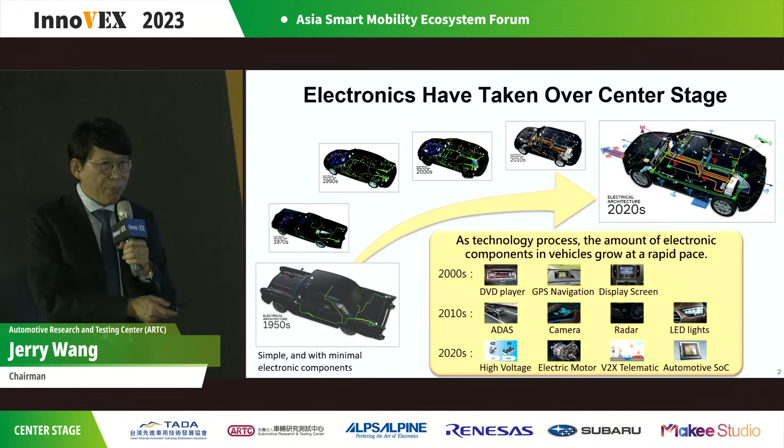Now let me introduce some data about our industry. The global sale of EVs went from just 2 million to 10 million units in 5 years. The major driver is the rise of Tesla and global government push for carbon net zero policy. So we think the EV market shows no sign of slowing down.

On the other hand, for our automotive electronic industry, the industry value was $295 billion in 2022, and is expected to reach 400 billion before 2027. The main driver is autonomous technology and the computing power of AI put in the car. Some people ask me why the car has changed so much - the main reason is AI, with many controllers, over 200-300 controllers, and processing chips put in the car.

About Taiwan, it's similar. Taiwan's automotive electronic value is increasing very quickly. In 2022, there was about 12 billion US dollars. We expect this value to double to 21 billion in only 3 years. So after three years, our automotive electronic value will increase very quickly.

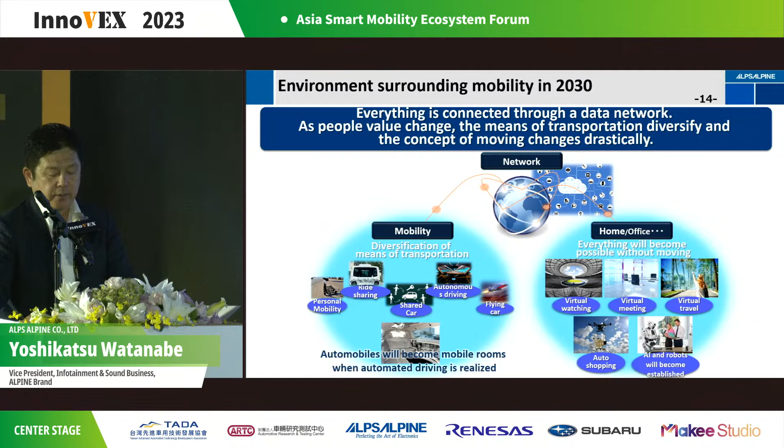Let me finally talk about our direction: digital cabin solution.

ALPS ALPINE is aiming to be an innovative T-shaped company. This is based on our strengths that we are developing both hardware and software, from device to system products, and from consumer electronics to automotive business.

So, we can utilize elemental technologies of ALPS solution and software and system integration of Alpine solution to provide new value for the changing automotive industry, as well as for other industries.

For the automotive business direction, at present, we handle almost all automotive HMIs, including displays, audio equipments, shifters, control panels, for center console, door, and armrest, and so on.

Throughout 2027, we are going to integrate all the HMIs into a group of products as an internally linked cockpit. Then, toward 2030, we are going to apply the integration process to the entire cabin space, turning it into a living room on wheels.

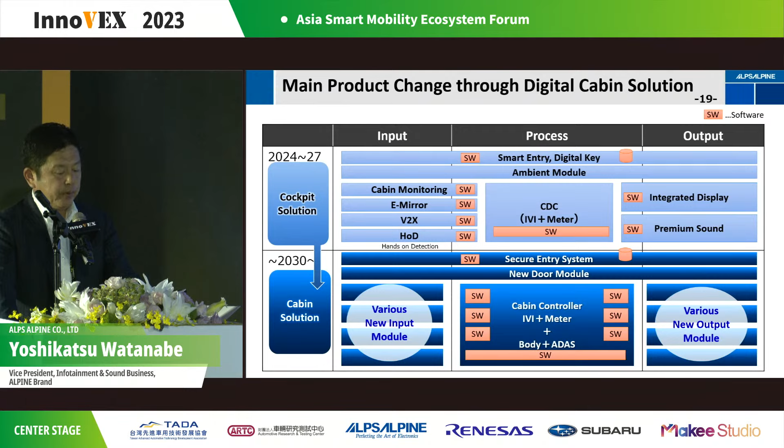Based on those architecture changes, we are adapting to provide cabin controller and necessary peripherals and middleware to realize in-cabin experience. Especially various sensors and actuators with middleware, we believe are one of the unique technologies from ALPS ALPINE.

To adapt to the architecture changes, we also strengthen alliances. We already announced a Capital Business Alliance with Nippon Seiki, who has strength around the meter and head-up display area. Also, a Development Business Alliance with TS Tech, who has strength around the seat and trim area.

We are co-developing with automotive manufacturers for the future cabin system.

One example I'll explain is developed with TS Tech last year. We call it XR cabin POC. This includes actual seat, steering, and door trim as hardware.

But the HMI interaction is realized by virtual reality, so that we can experience quickly the various use cases such as ADAS warning, immersive entertainment, relaxation space, and verify the value, then make improvements if necessary.

More recently, Renesas began expanding its footprint in Silicon Valley, first with the acquisition of Intersil in 2017, and then IDT in 2019. Renesas successfully combined its proven quality with top-class safety standards and technical competency with the innovative products and entrepreneurial spirit of Intersil and IDT. In 2021, Renesas completed its acquisition of Dialog, expanding its footprint in Europe. With Intersil, IDT, and Dialog now in the fold, Renesas enters a new era as a truly cosmopolitan company with a progressive mindset and a modern vision to lead the industry.

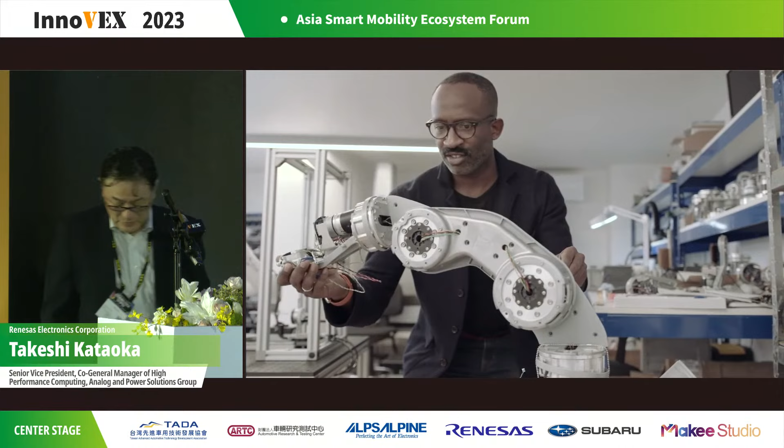What is Renesas's purpose in business? Our purpose is simple: to make our lives easier. We do this by harnessing the power of technology to complement human capabilities. And our lives don't just mean the people who use the final products powered by our technology. It means the lives of our suppliers, customers, our employees, and their families.

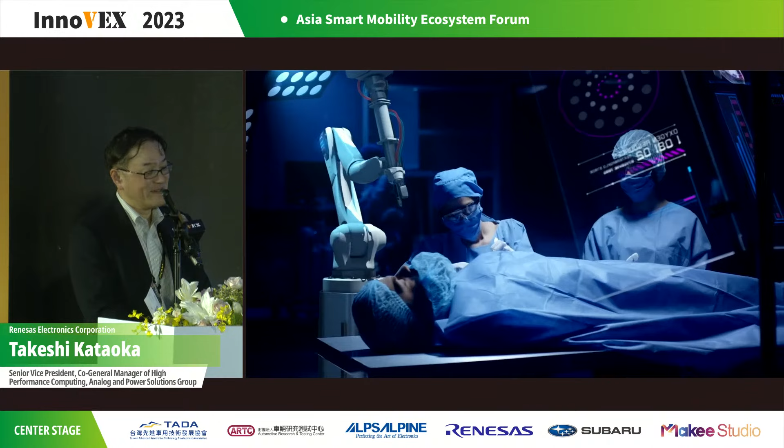To make human lives easier, our products provide advanced driver assistance systems, alternative fuel vehicles, robotics and human-machine interaction for smart factories, state-of-the-art medical devices, home appliances with intelligence, data centers handling big data and data explosion, and fast, low latency 5G wireless communication networks.

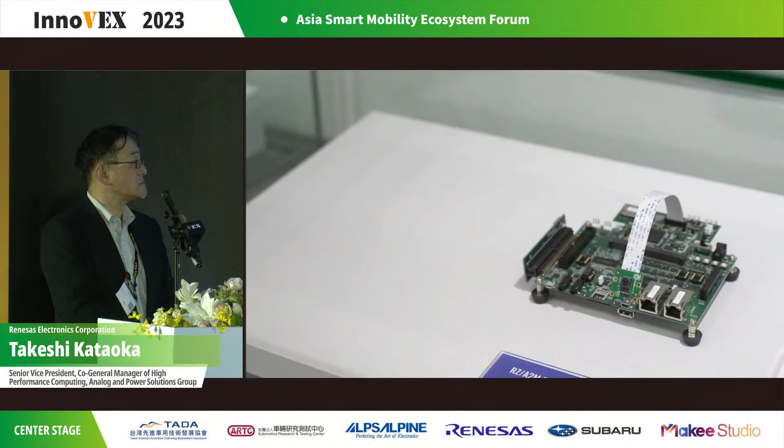To make our customers' lives easier, we deliver a vast array of semiconductor products such as MCUs or SoCs, analog and power, to provide complete coverage for the broad signal chain in electronic systems. Renesas customers win by tapping our rich portfolio of analog, power, and embedded processing solutions. Our winning combinations help customers accelerate their designs and get to market faster with high performance and high quality products. These winning combinations address the needs of new and expanded customers and continue to power our customers' systems with compelling products and solutions designed with our proven technology.

Renesas has weathered many storms and changes and is in a constant state of transformation to become a stronger organization. We will continue this journey to make a better world through our technology and make a positive impact on the way we live and work. Here at Renesas, everyone can make a difference. Together, we can make change happen.

Okay, so then next, please.

As the video mentioned, Renesas is originally three Japanese companies: Hitachi, Mitsubishi, NEC. We are strong in digital products, MCU, SoC. But after acquiring many analog companies like IDT, Intersil, Dialog, we are expanding our product portfolio, not only digital but also analog and power.

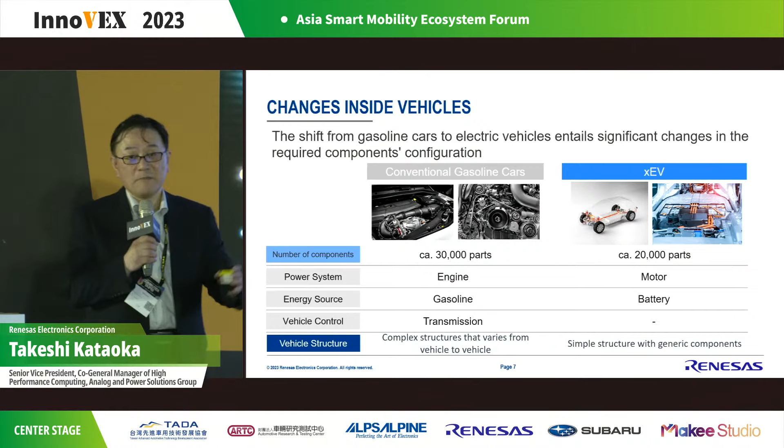Also, no more transmission, actually. And then vehicle structure will also be simplified in xEV. That means many new applications are now coming for xEV.

So with this kind of very big change, the value of a car is clearly changing from a conventional mechanical thing to more software and services. Now OEMs and Tier 1s are very much focused on making their own software platform and architecture, because the value of a car is now changing to such software and services. Especially OEMs try to define both hardware and software architecture to be optimized for such a software platform, because they think this will be the value.

For example, as you know, Tesla is making their own SoC, right? To optimize their solutions. In such a sense, OEMs try to directly connect with semiconductor suppliers and also, for example, foundries. Such direct communication is now happening.

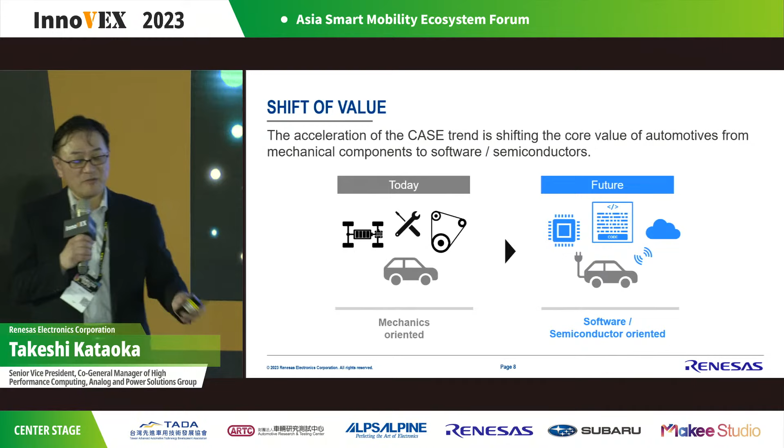Okay, so from here I'd like to explain three key things for this big change. First is the evolution inside the vehicle, meaning the E/E architecture change.

As you can see on the left side, this is the conventional old automotive architecture, a distributed architecture, which means each ECU is connected in a very complex manner. But due to this, the system becomes complex, and the number of ECUs increases. So now it's very difficult to make software and systems for this kind of complex architecture.

That's the reason why OEMs and Tier 1s are shifting to a more centralized architecture, which has a central gateway and domain controls. The central gateway operates data communication, and each domain control operates each domain. Domain means application, for example powertrain domain, chassis domain, also body domain. This centralized architecture is called domain architecture, and will enable OTA software update, scalable software development, also wire harness reduction.

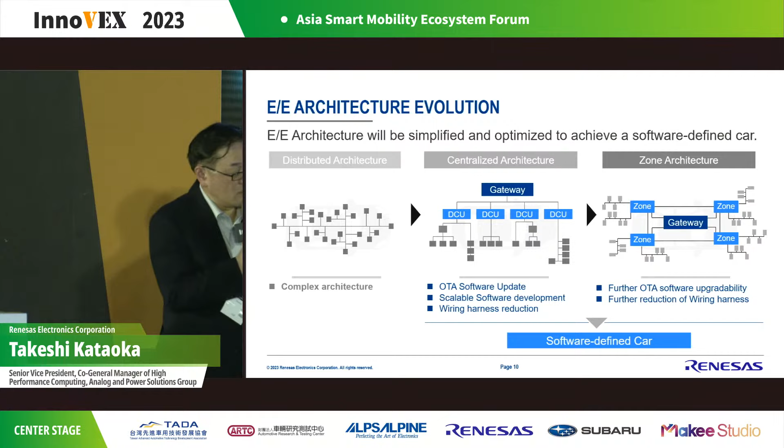must be more flexible for software reusability and software portability, because depending on the car model, OEMs think they want to reuse their software assets across car models or across car generations. So they want to reuse the same software between a zone, or between a gateway and a zone. This is a very fundamental thing.

So for such high software reusability and portability, this is a key thing for zone architecture. But this will mean faster time to market, also lower development cost for OEMs and Tier 1s. So Renesas is offering a full scalable solution with software IP commonality to realize this software reusability and portability. I will explain more about this later.

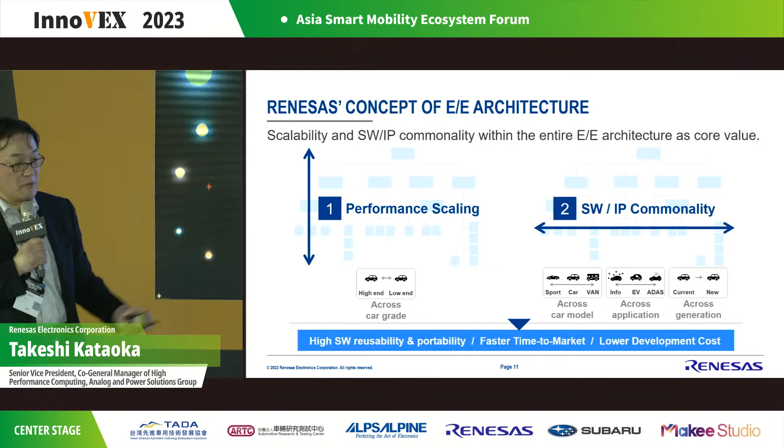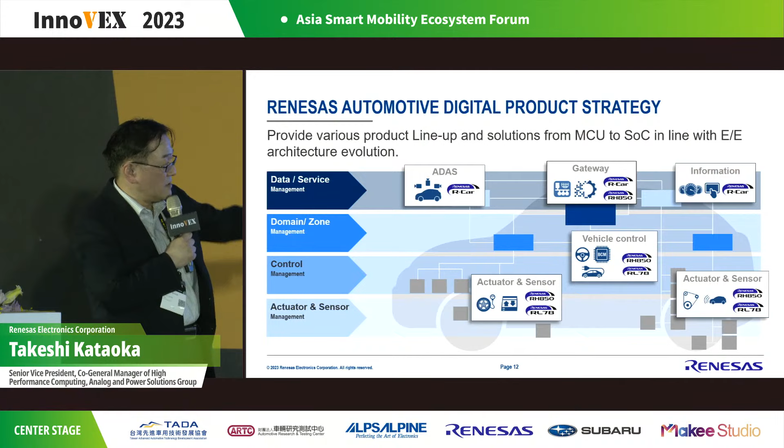Renesas is offering a total solution for various automotive applications from high-end to low-end. For high-end, high-performance computing for ADAS, gateway, infotainment, and then domain and zone control, also conventional vehicle control, by using our MCU, and also actuator and sensor solutions to manipulate a motor and such kind of thing by using our 16-bit micro for actuators and sensors.

So now let me show our central gateway solution. Please.

In a world switched on, Automotive Ethernet will become a game changer for the next generation of vehicles and mobility. While CAN has dominated the car network for nearly decades, we face a revolution for the in-vehicle architecture when moving to Ethernet-based networks. Exponential growth in bandwidth combined with quality of service allows innovative new architectures to improve comfort and safety, in order to pave the way to a highly assisted and finally the fully autonomous car.

With our partner TTTech, we have developed this evaluation platform called Vehicle Computer 2. It represents a multi-gateway solution that supports all major automotive communication interfaces, covering LIN, CAN, FlexRay, MOST, and Automotive Ethernet, and allows flexible routing between all of them. The box is equipped with the powerful Renesas R-Car H3 SoC, the RH850 F1K microprocessor, and an FPGA-based implementation of an Ethernet TSN switch.

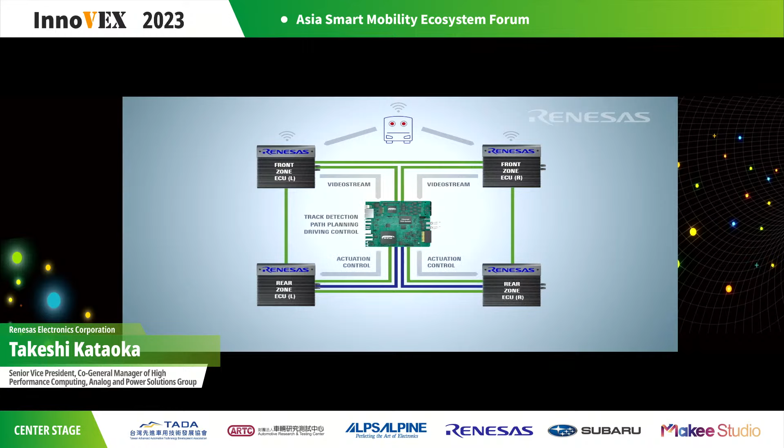These ECUs forward the video to the central ECU for track detection, path planning, and driving control. The steering and driving commands are then sent by the rear zone ECUs to the RC control of the model cars.

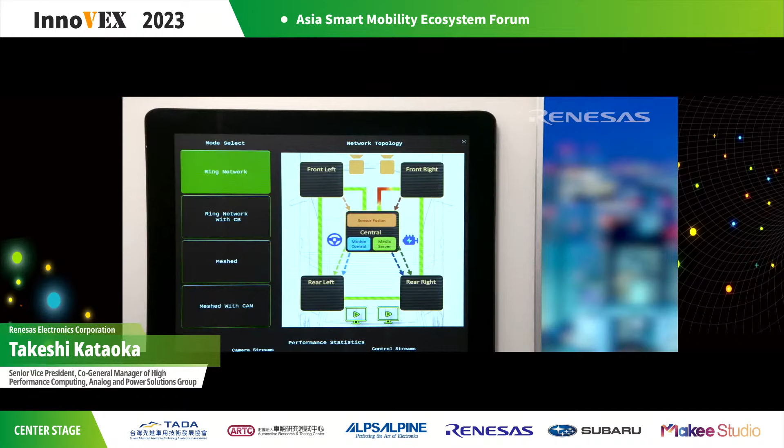With disabled frame replication mode, any failure on a link will immediately stop the car in operation. Now, after enabling frame replication, the cars move on because the existing links between the boxes will use both directions. Mesh mode offers more redundant links between the boxes. Such configuration tolerates more link failures.

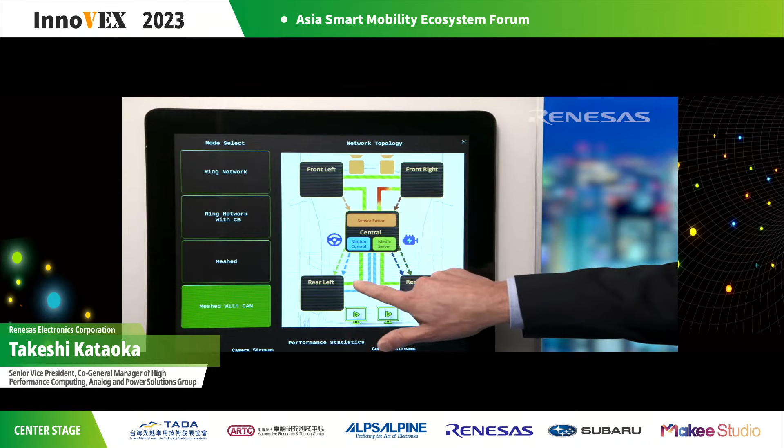Finally, a mixed network with CAN-FD and Ethernet also covers network diversification, which is an important element for functional safety. The backup for control traffic is covered by CAN-FD, so even with failures on both Ethernet links, the actuation control is still in operation. Thank you very much for your attention. I hope to see you soon on a live event from Renesas.

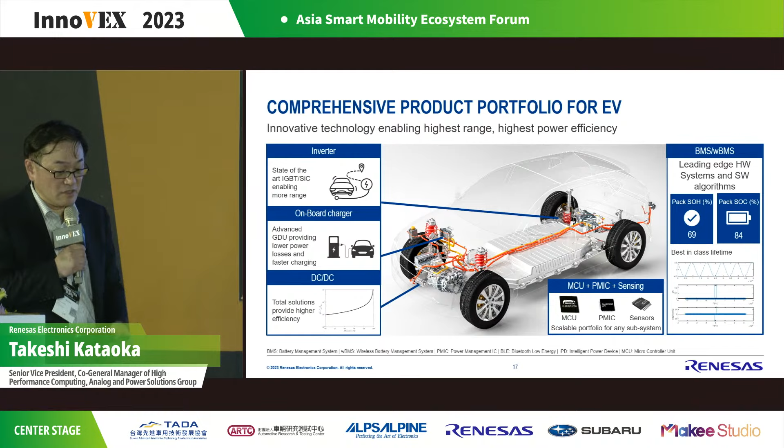So let me show our inverter solutions. Renesas Electronics XEV Inverter Reference Solution.

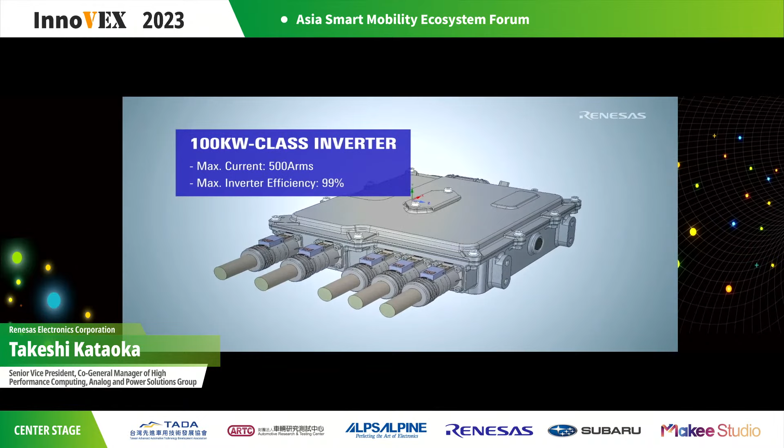This reference design from Renesas Electronics offers the world's smallest 100 kilowatt class inverter to address the rapidly growing market for electric and hybrid electric vehicles. The hardware design is complemented by a calibration tool to maximize motor performance, and motor control software to optimize the performance of the host microcontroller.

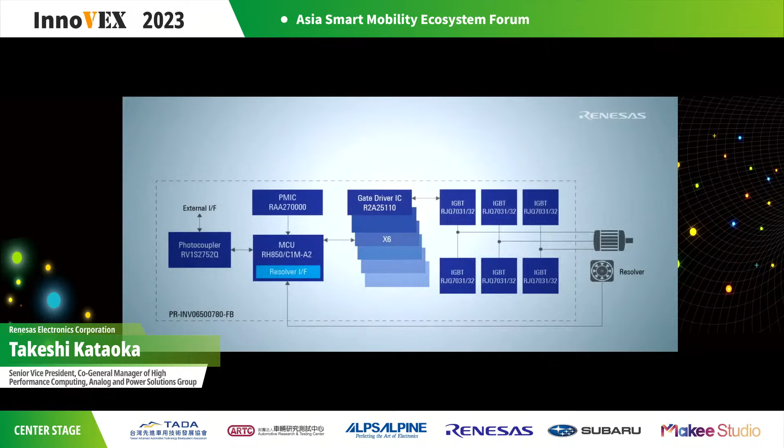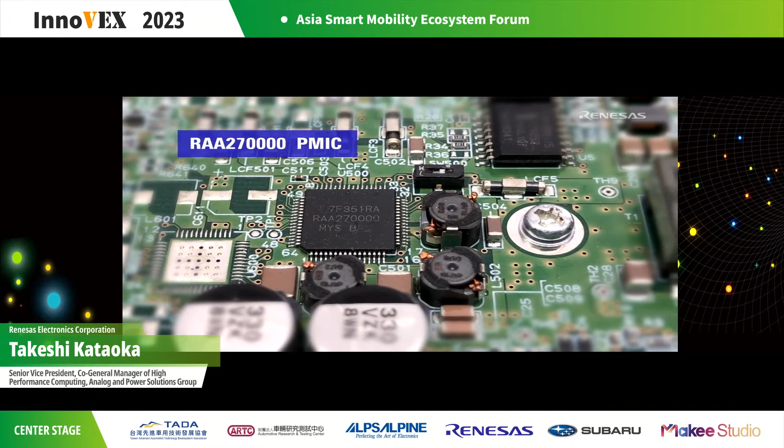The hardware design includes the Renesas RH850 C1MA2 microcontroller, optimized for motor control with a built-in resolver to digital converter, a power management IC designed specifically for RH850, a high voltage gate driver with built-in micro-isolator technology, and IGBT and FRD power stage devices.

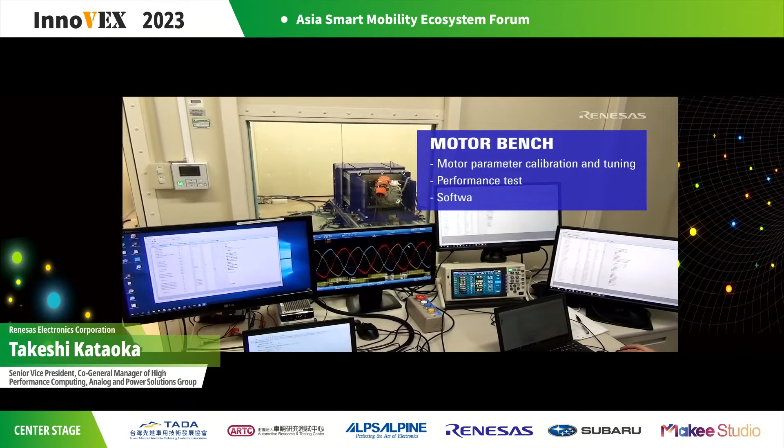Using this 100 kilowatt class motor bench, Renesas can accurately measure motor parameters and evaluate system performance using the incorporated hardware and software. Renesas is also readily available to help customers realize new requirements at the system level.

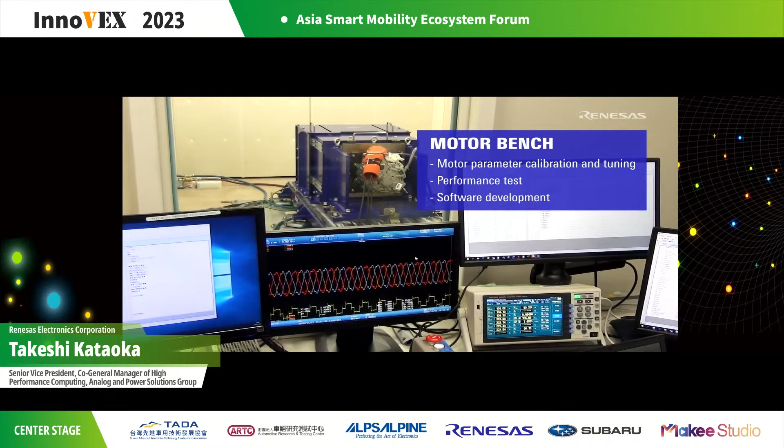Renesas has built up a demonstration vehicle equipped with this inverter and confirmed its performance in actual driving environments.

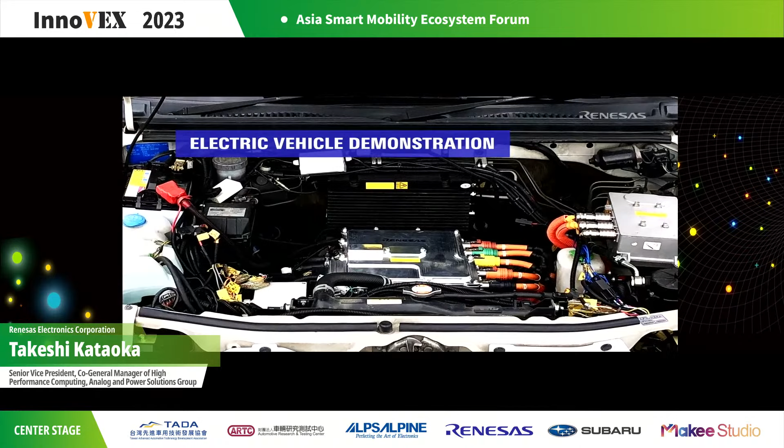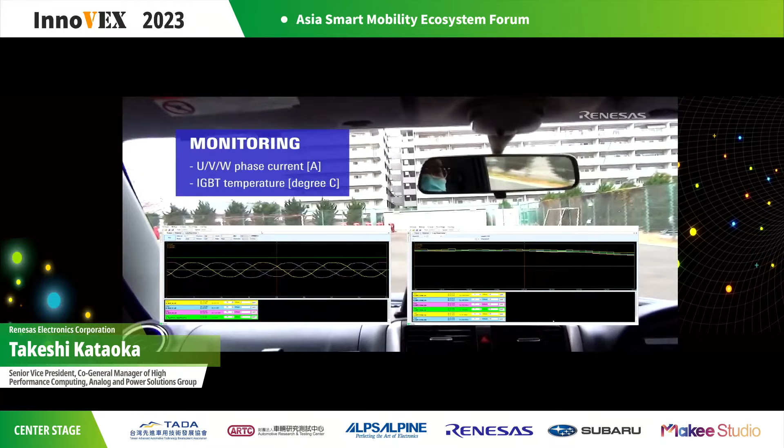Customers can utilize this solution to easily realize a highly efficient system and immediately evaluate a prototype inverter system in an actual vehicle. Prototype development that typically takes 2 to 3 years can realistically be cut in half.

So Renesas is offering a total solution - digital product, MCU, SoC, analog, and power - with software, even with a software development environment, as you can see.

So Renesas can offer a total solution using our products, especially our MCU is very powerful - our MCU can handle all applications with one MCU. So this is our solution. Customers can enjoy system level optimization by using our turnkey solution. Also this will accelerate customers' development.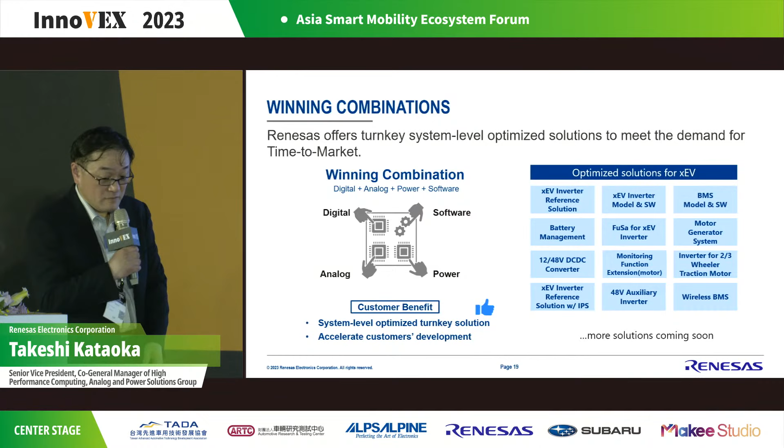Okay. And one more important thing about XEV is the power semiconductor itself. As you know, now IGBT is shifting to SiC for inverter control. But maybe both will be used anyway, due to cost reason or supply reason.

Renesas will offer both IGBT and SiC. As you can see on the left side, our IGBT's total loss is better actually compared with our competitor. This is very much a benefit for our customer OEM for longer distance driving with longer battery consumption time. So this is a key characteristic for this IGBT for XEV.

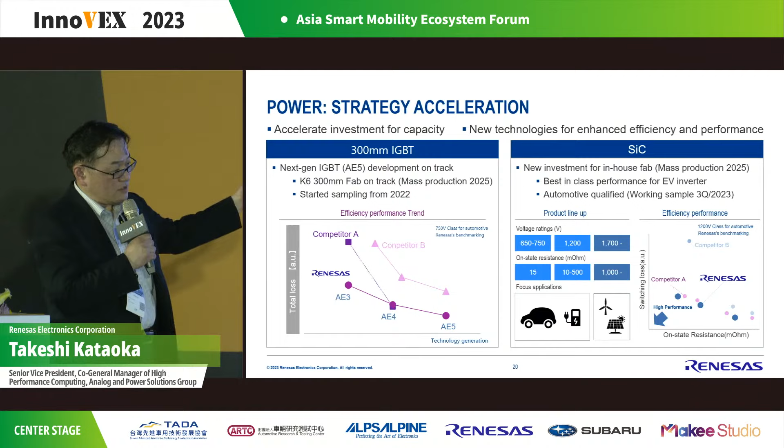And then we already decided to expand our internal capacity in Kofu - K6 is in Kofu, Japan - to expand our production for 12-inch IGBT. And then on the right side, this is SiC.

We also decided to invest in our internal fab for mass production of SiC. Our SiC characteristic, switching loss, is also best in class performance for EV inverter. We already completed automotive qualification. So Renesas will continue to offer both IGBT and SiC.

Okay, so the last portion is AD, ADAS. There are several key applications. Sensing-wise, of course camera, LiDAR, radar - these three sensing types are very important.

Then from this data from such sensing, high-performance computing is very important using a central AD/ADAS SoC, also gateway for data handling, also domain and zone control. Then on the actuator side, a 32-bit micro will handle real driving, braking and steering. So Renesas can offer a total solution for all these applications with our SoC, MCU, and analog devices.

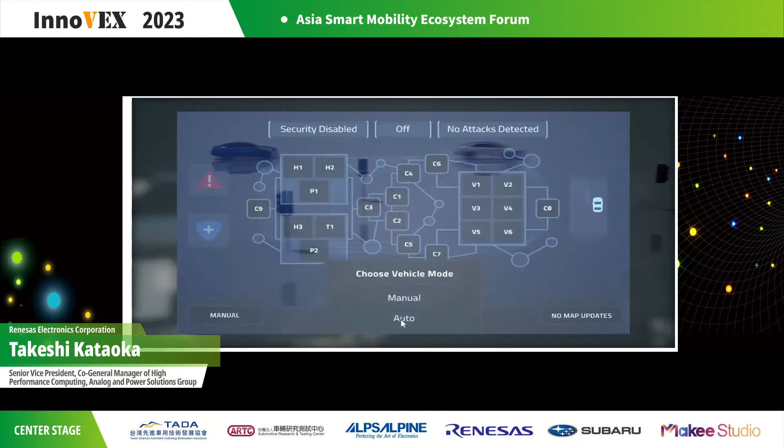What we're going to do is take this car for a test drive on a track in autonomous driving mode, so you can see some of the areas of autonomous driving we're studying. If I use the HMI here to enable the system and press the automated drive button, we start moving. Right now the vehicle is able to follow a path onto the outer loop of our track, which is defined by a high-definition map.

Here you can see a vehicle that is coming. Our car has detected that vehicle. We wait for it to pass, and then we can proceed.

So we're also able to use our cameras to detect traffic signs. For instance, this 20-mile-per-hour sign, we've detected that. You can see that on our display, and so the vehicle is going to hold that speed.

You'll see that we're detecting many signs throughout the track, including this construction sign. Once we've detected that sign, a cue comes up on the HMI asking if we would like to check for an over-the-air update of our high-definition map. A lot of times a construction sign could signal to our system that the environment has changed and we might want a new map.

So if we go ahead and accept the update, what we've just done is triggered an over-the-air update, and this is done with a secure mechanism that we created in cooperation with our partner, Airbiquity, in order to bring that high-definition map into our system through a completely secure channel.

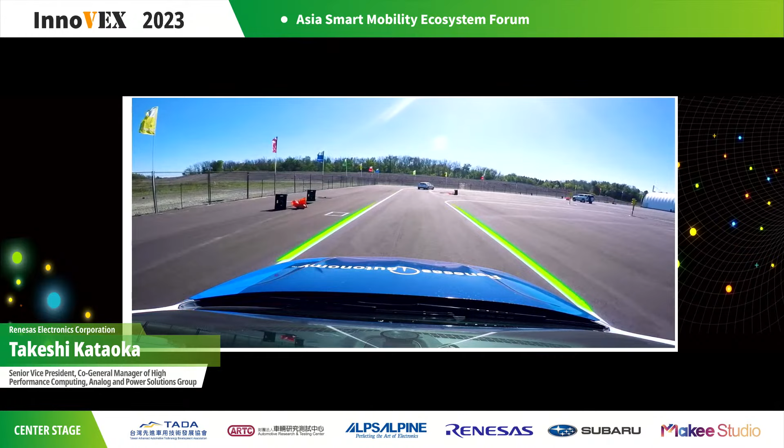Continue around the outer loop. What we'll notice is that the vehicle is able to maintain position perfectly in between these lane markings. These lane markings are actually very important to us. We can use these as visual cues in order to determine where the vehicle is on our high-definition map.

So thus far, we've been staying on the outer loop. Now I'd like to go into the intersection portion of our track. And the way we tell the car to go in the intersection is by using the turn signal.

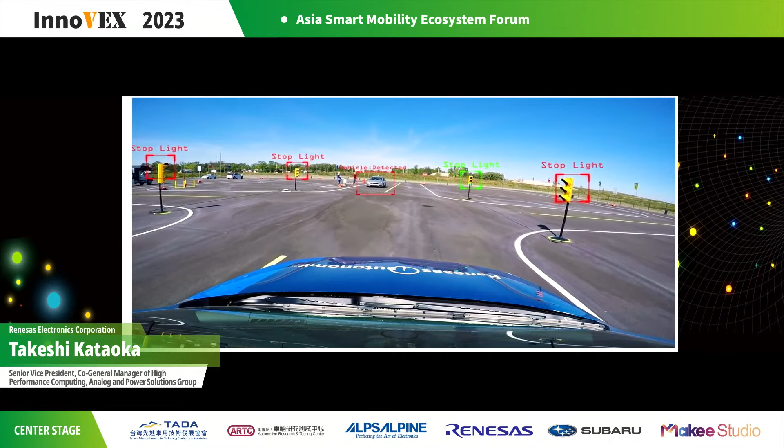Now, as we turn into the intersection, what we'll find is that with this intersection, we have 4 traffic lights. And each of those lights we detect with this car with a combination of both V2X and the cameras on our roof. The cameras can actually look at the light and tell if we're green, yellow, or red.

We wait at the red light, and we want to go left, which we tell the vehicle by using the turn signal. But of course, we've also detected a vehicle that we have to wait to pass us. And once the vehicle's passed, we can make our left turn. Of course, the vehicle detected with both cameras, V2X and LiDAR.

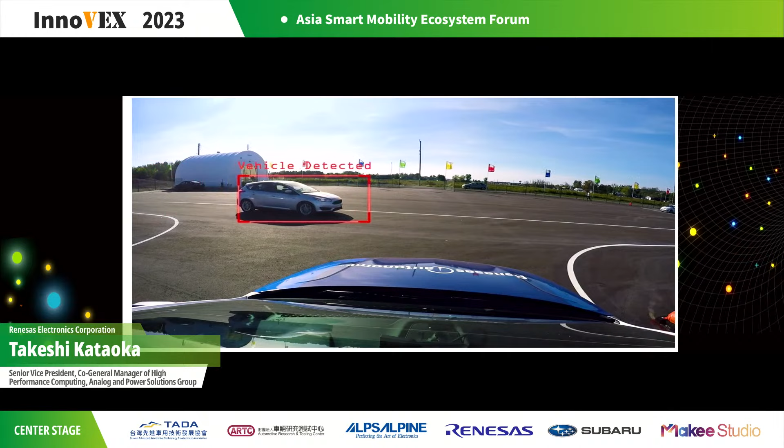We come to a stop sign that we've also detected with the cameras on our roof. And now, with a clear path, we can go ahead and turn back onto the outer loop.

So now we're going to go ahead and turn back into our intersection, which we use with the turn signal. Only we're going to make things more interesting. We're actually going to fail, using our HMI, one of our vision processors.

What you'll notice is that we still have full functionality. Our vehicle will still turn in the intersection, only now our car, having noticed that we have a failure, is looking for a place to park.

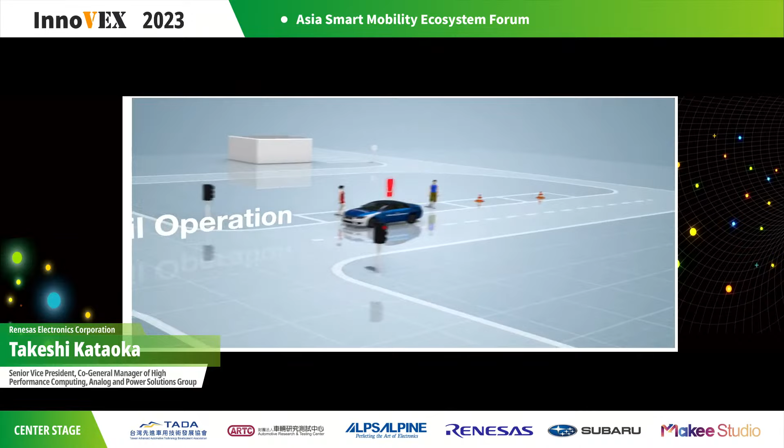But as you notice, all of our parking spots are full of cones, pedestrians, things that just make the parking spot not empty, and therefore, despite the fact that we detected it, we can't park there. So it takes very advanced computer vision to tell that you have a parking space, but you can't park there because there's some object in the space.

We still have enough functionality in this fail mode to wait for our red light to turn green. Now that our light has turned green, we will go ahead and proceed.

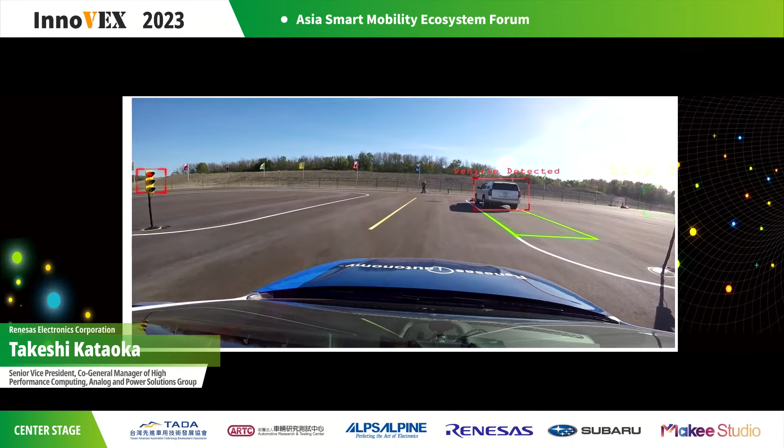And here we actually have an empty space. The vehicle detects that it's empty, and we go into a parallel park to pull over into our fail operational location.

So this entire time, we've found that we've either been in our drive route mode. Now I'd like to enter the third autonomous driving mode we have in our system right now. We call that drive parking. And when I press this button now, our system immediately is looking for our home parking space.

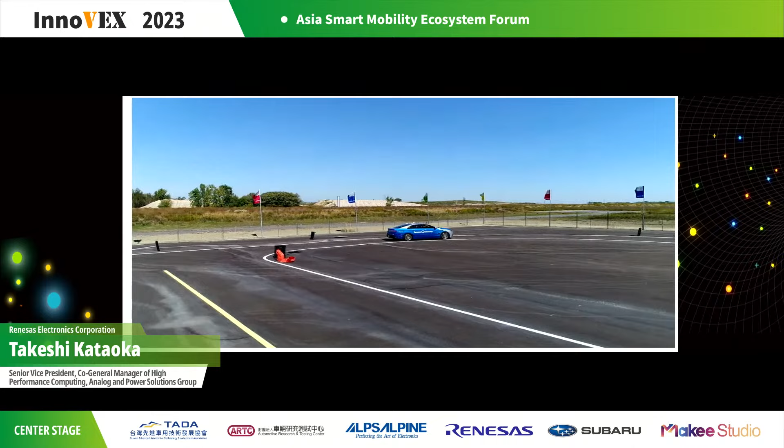So what it'll do is it'll continue driving the outer loop. And then when we get to the end here, we're actually going to make a left in the car automatically because it knows that our home parking area is right here. And as we pull in, immediately it's looking for an empty spot, that there's a parking space candidate based on the lane marks, and it goes ahead and pulls us into our home parking space. And that concludes the demonstration.

One more important thing is ADAS evolution. Currently, ADAS function is basically level 2 or level 2 plus, but in the future such level will evolve to level 3, maybe level 4. For such evolution, the number of cameras and radars will significantly increase. Also important is fusion operation: using both camera and radar data will be key to realize more precise image and object detection.

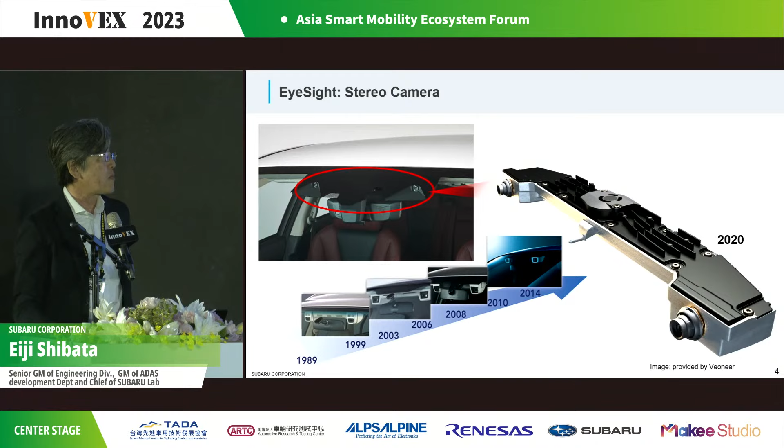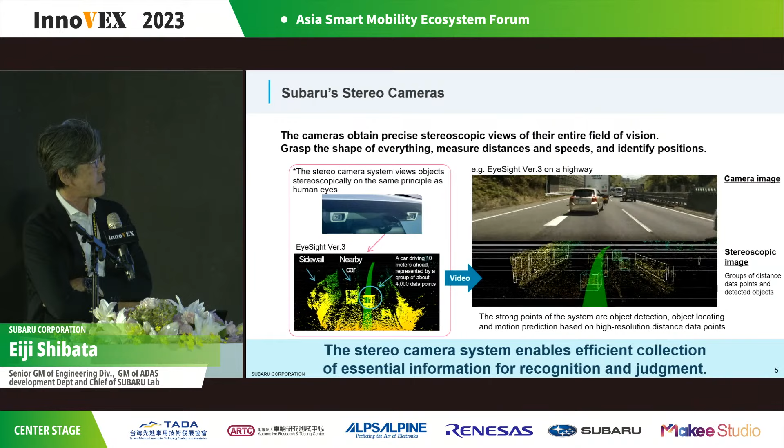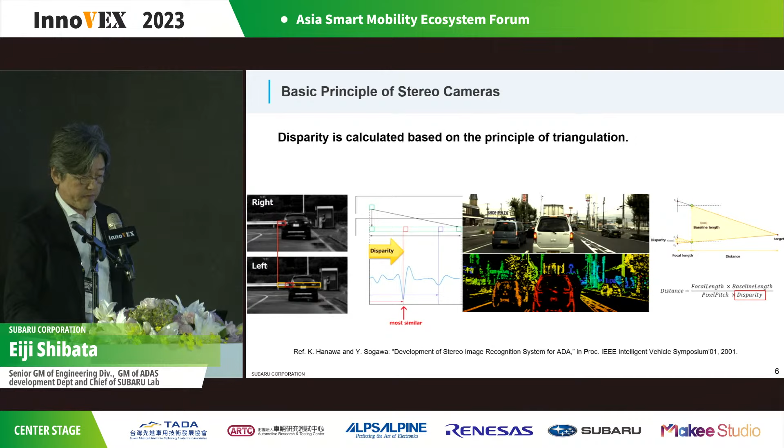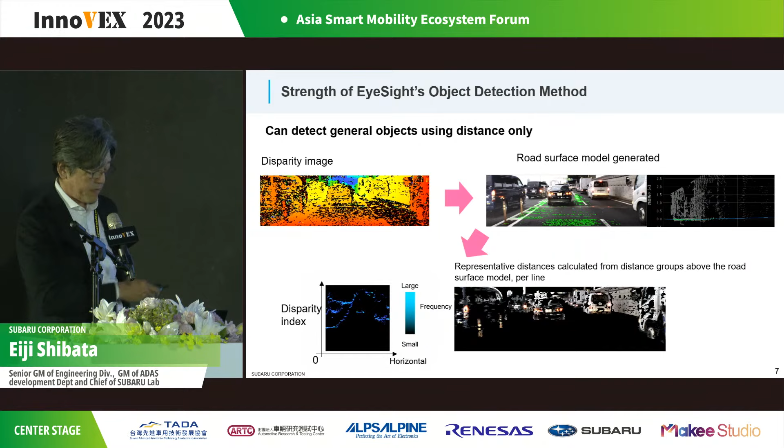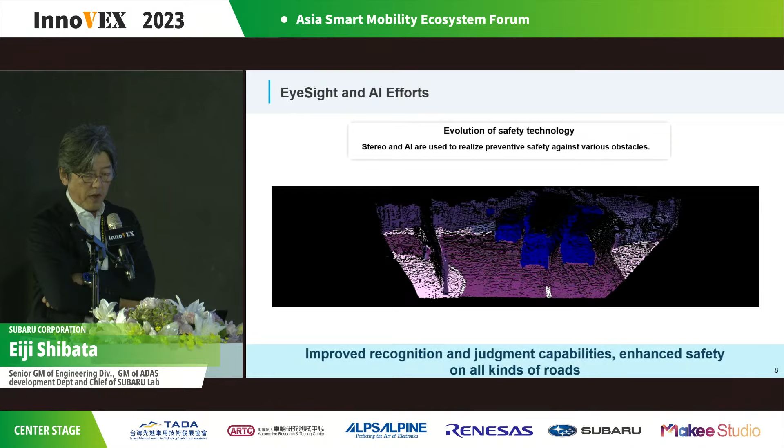So how will this algorithm evolve with AI? The image shows an example. You can see everything in 3D by depth information, but you only understand the size, shape, and position—you cannot understand what it is from depth information alone. AI will add more information. For example, purple means the roads, pink means the sidewalks, and this feature will help better recognition.

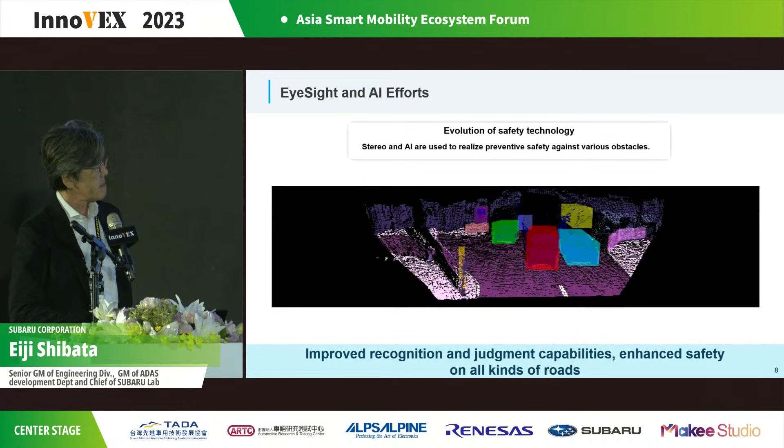Now I would like to talk about the general development trend in cars and AI. There are many objects that must be detected in the driving situation, such as other cars, lanes, and traffic lights. In addition, the semiconductors need to operate with very limited power consumption and should be low cost. Therefore, a highly integrated and efficient multitask network structure is often used.

Here is a diagram of our AI architecture. We have developed our own multitask network, where over 20 heads—such as object detection, road marking detection, depth estimation, and segmentation—share a single backbone. We call this SUBARU ASURA Net.

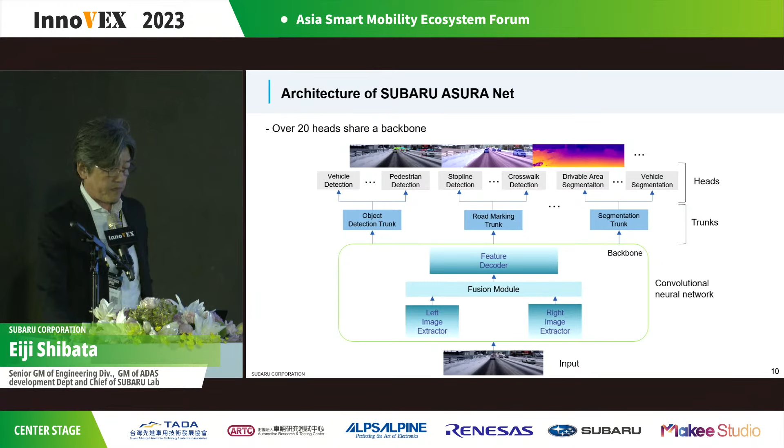Meanwhile, our stereo camera can also calculate disparities for each pixel. This means the disparity image from stereo cameras and the AI segmentation can be matched pixel for pixel perfectly, because they are from the same image source. On the other hand, a system that combines different sensors, such as a monocular camera and LiDAR, does not work like this, because the fusion from different sensors is not so easy. This is the reason I believe the AI stereo camera is best.

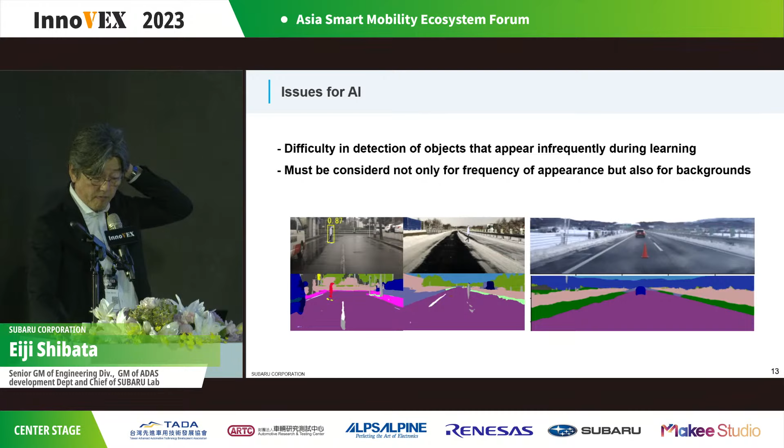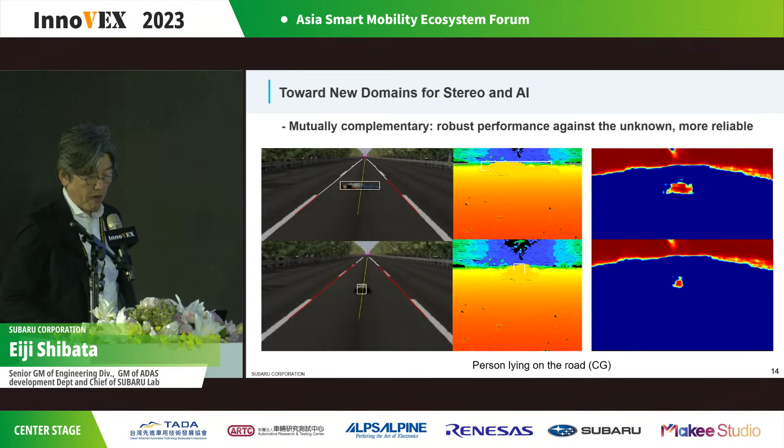So what can we do? We use the stereo camera and AI to complement each other. These are CG images with a person lying on the road. Of course, these are rare situations, but the stereo camera can potentially detect everything, even for the first time. But the stereo camera does not recognize what it is—it could be an obstacle to stop at, or just a bump to climb over. AI can classify it. So by combining the stereo camera and AI, we can realize more reliable and robust sensors. This is our way.

From here, I would like to talk about another topic: the challenge of applying AI to autonomous driving. The typical AD/ADAS systems are designed to be used on highways. However, there are various challenges in applying the system to urban roads. What's the difference?

The essence of the problem is here. The physical parameters for steering control are different between highways and urban roads. On highways, the target steering angle is directly decided by the curvature of white lines. But on urban roads, what should be the physical parameters that are highly correlated with the steering angle?

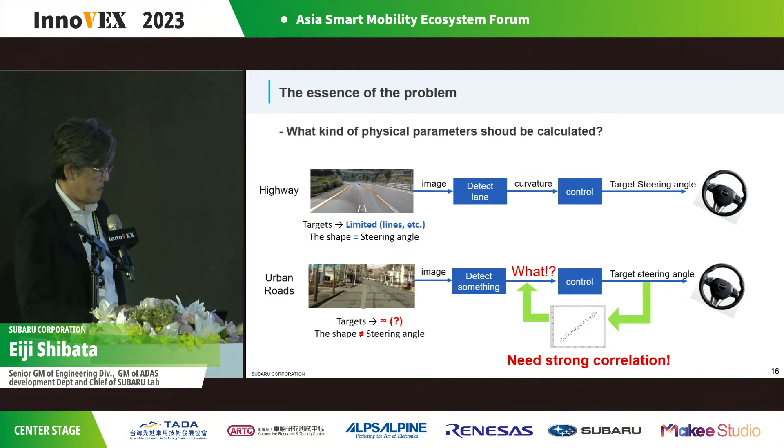AI is a powerful tool for such problems. Even if we cannot design clear rules, a data-driven approach can lead to probable answers statistically. We are developing a path detection AI model like the end-to-end approach. This model inputs multiple past images to a CNN and connects them with an LSTM unit.

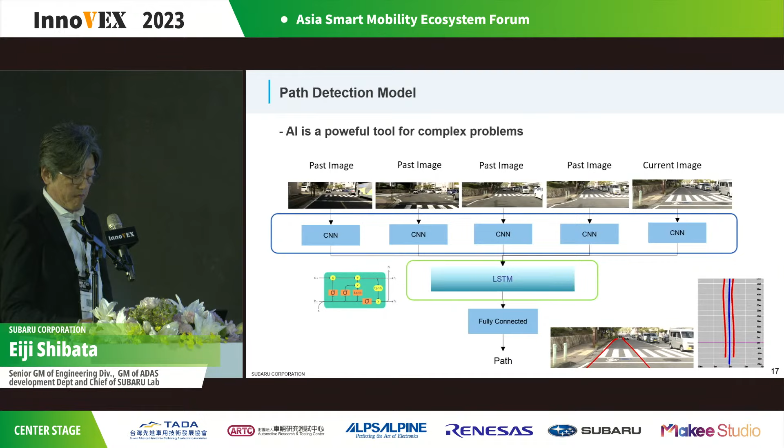When we use these methods, data and annotation are really important. There are many different driving situations in the real world. When we drive the car, we understand something and decide our behavior, but if we cannot define it, we can't create the training data.

For example, there are no clear lanes at an intersection—which lines should be learned as the correct driving path? The driving path also varies depending on the driver, on snowy roads and roads without a center line. Furthermore, the result of recognition changes each time depending on the environment, such as light conditions. Regardless of the evolution of AI, such repeated data collection, annotation, and tests are always the most important.

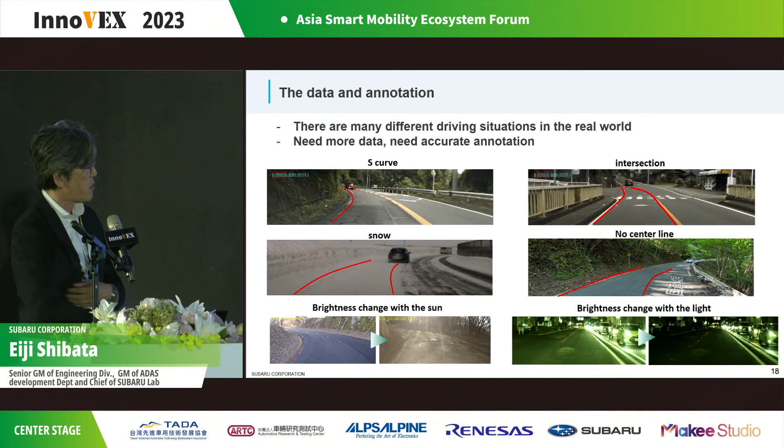Our team often says the car is the best teacher for us. Even the most stubborn engineers, who don't listen to their bosses, recognize the problem by themselves when they are driving the car. Test drives are also very important for AI engineers.

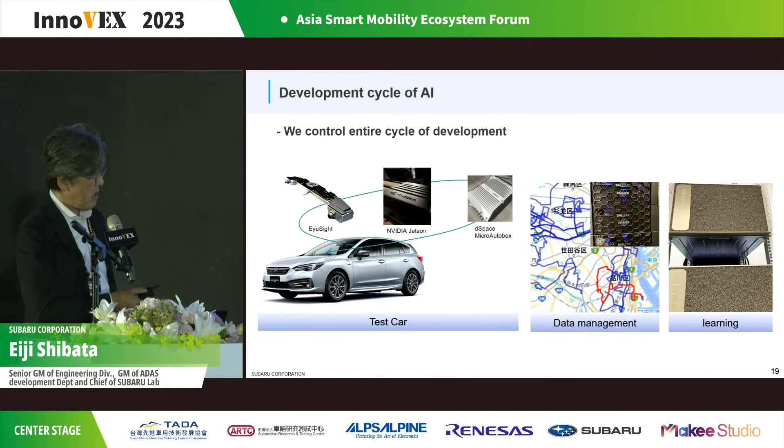Let's watch a video of our autonomous driving car. In the snow road situation, this car only has a front stereo camera—no radar, no LiDAR, no map. Only the stereo camera can control autonomous driving on the urban road and the mountain road.

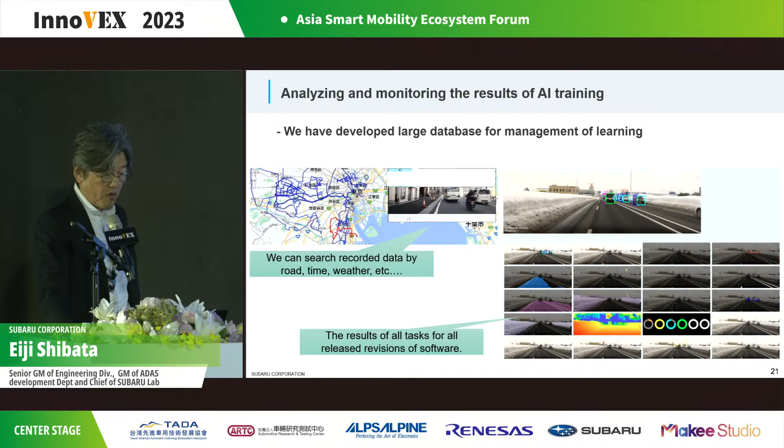We have a huge amount of driving data in on-premise storage, and we upload annotated images to the cloud to train our AI.

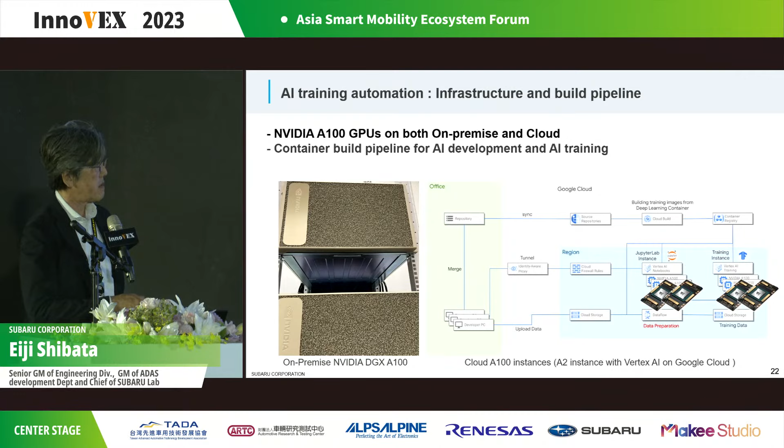This slide shows our cloud environment. We choose the training environment depending on AI workloads. In the early stage of AI development, we have to recreate training data frequently to support new methods and new models, because input-output formats change frequently.

Last year, we built the data pre-processing pipeline on Google Cloud using the Cloud Dataflow service to easily try new AI models and new data formats. On the other hand, we use the on-premise environment for heavy load training using a large amount of driving data.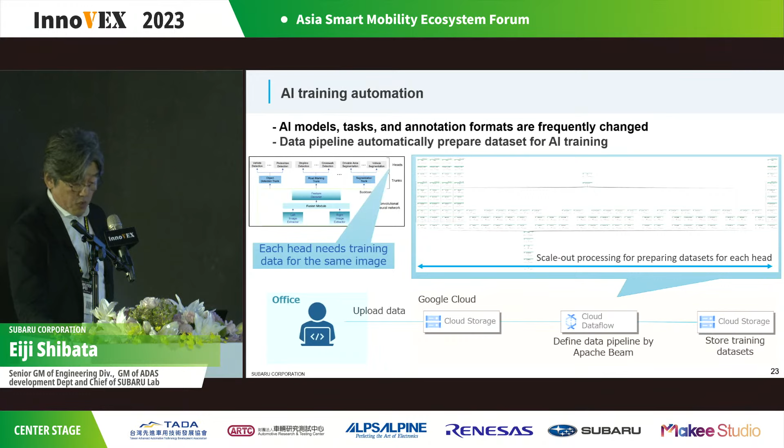The final topic is development with CG. The camera sensor and CG technology are a very good combination. There are mainly three advantages. First, we can create data with perfect labels and ground truth, such as accurate object distance and velocities. This is very important for AI development and training.

Second, we can duplicate the same scene data with slightly different parameters, such as 30 meters, 31 meters, 32 meters. This is very important for detailed analysis of the problem. Last, we can create edge case data that is difficult to record in an actual vehicle, for example, a collision scene.

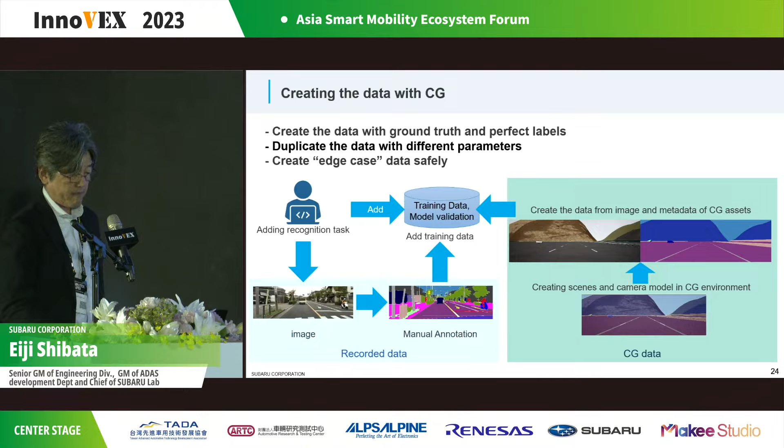The first example is the CG data with perfect labels. We create this data and use it for AI training.

The next example is duplicating the data. When we find some issues during actual driving, we create the digital twin for deep analysis. We don't know if the problem is due to the weather, the shape of the car, or the distance. However, we can change any parameters with CG.

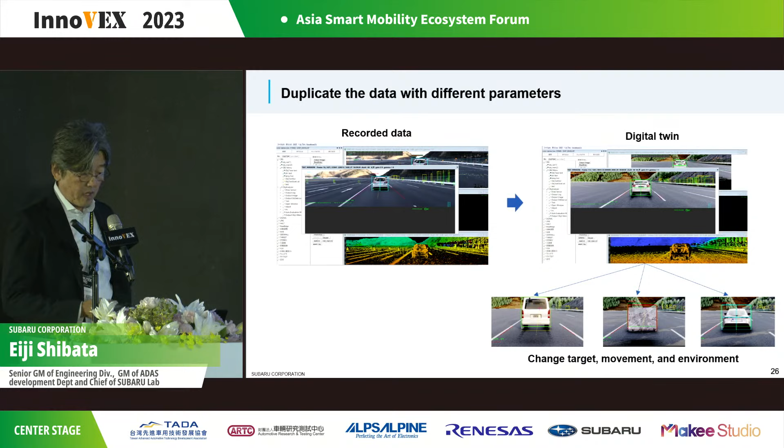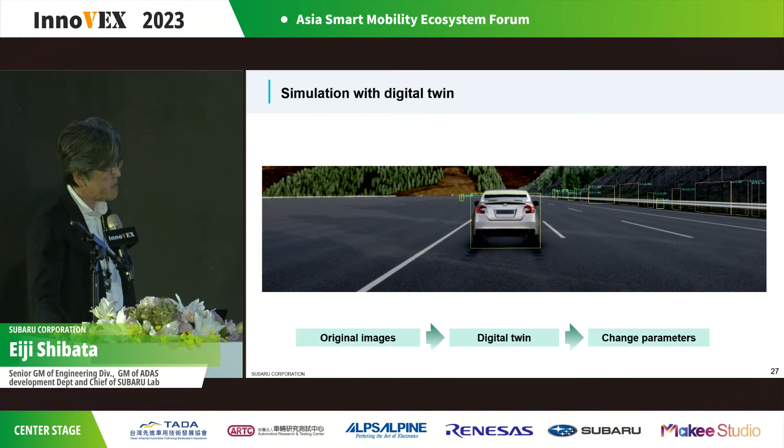Let's watch a video. The first is the original image from the stereo camera. Next, we create the digital twin like this, and we change some parameters. This is a moving wall, which is a very good target for testing because the surface is very flat, allowing us to calculate the accurate distance.

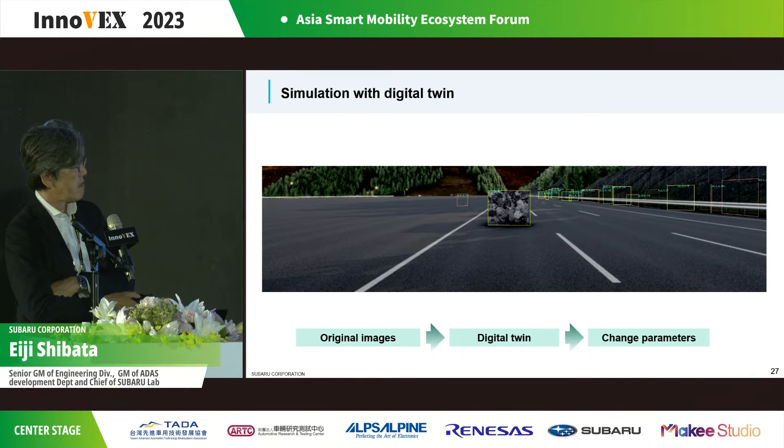Finally, I will explain the development of the creating pipeline. We are developing a pipeline that efficiently creates CG using the recognition results from our stereo cameras. Based on the detection results from EyeSight, we create the 3D point cloud space with labels.

We compare the detection results with the map data and place the assets in proper positions in CG space.

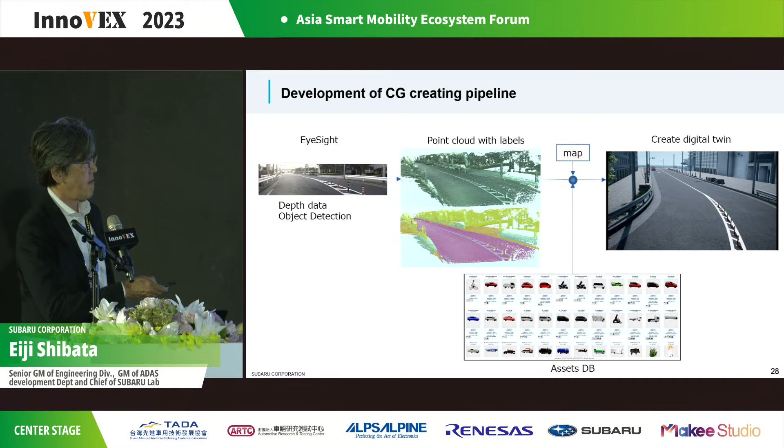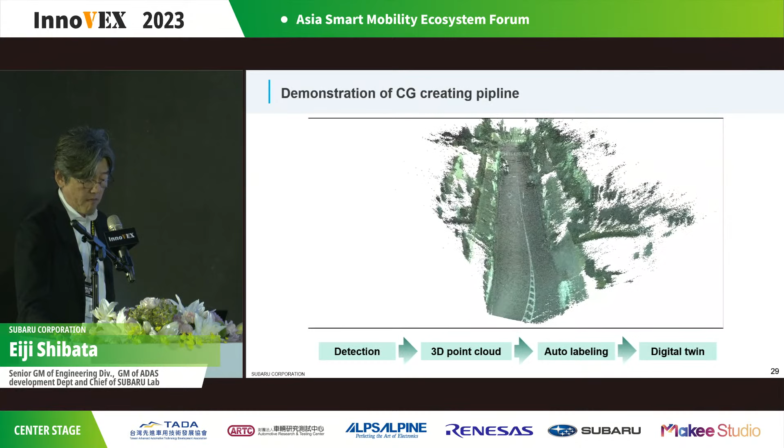Next, this video shows the CG creating pipeline. The first is detection results from EyeSight, showing the 3D point cloud from EyeSight depth data. The labeling data is also created by EyeSight AI detection results. And the last is the digital twin data.

Here is the conclusion. We developed SUBARU AstraNet AI with a very good combination with our stereo camera. Regardless of the evolution of AI, repeated data collection, repeated annotations, and test driving are always the most important. We built automation pipelines for AI training in both on-premise and cloud environments to achieve more efficient development. And we utilize the digital twin generated from stereo camera data to develop EyeSight and our AI.